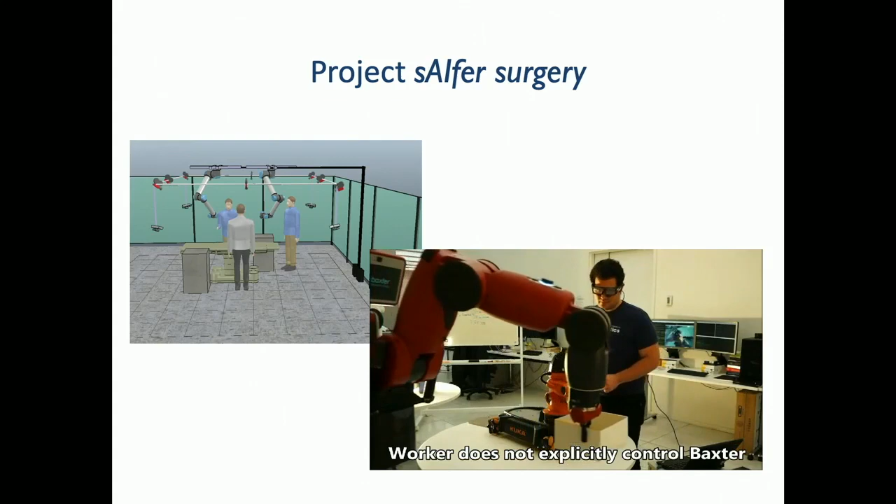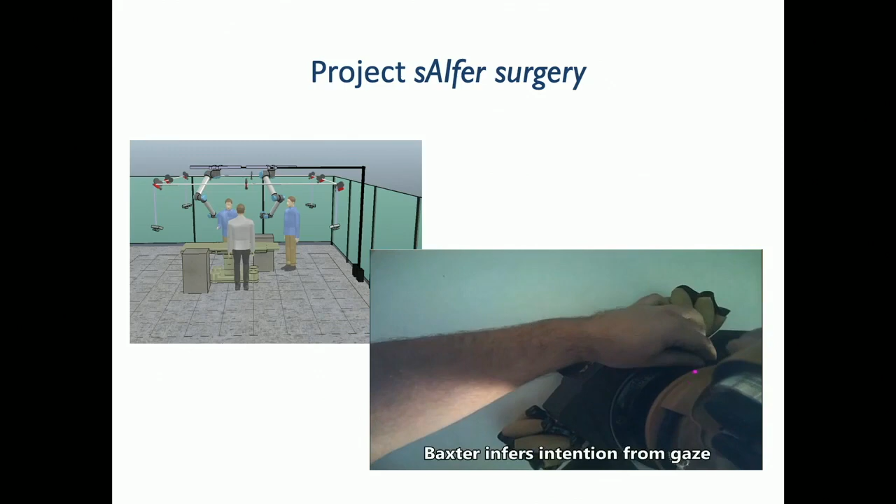This is not surgery, this is actually assembly in more of a manufacturing context. But this is in my lab, and that's my PhD student, Svetlin. What's going on here is that you have this Baxter robot trying to help Svetlin as he's assembling another robot. His sequence of movements is a plan. He goes through: pick up this part, put it on top of this, once I have it, get something else, assemble it, and so on.

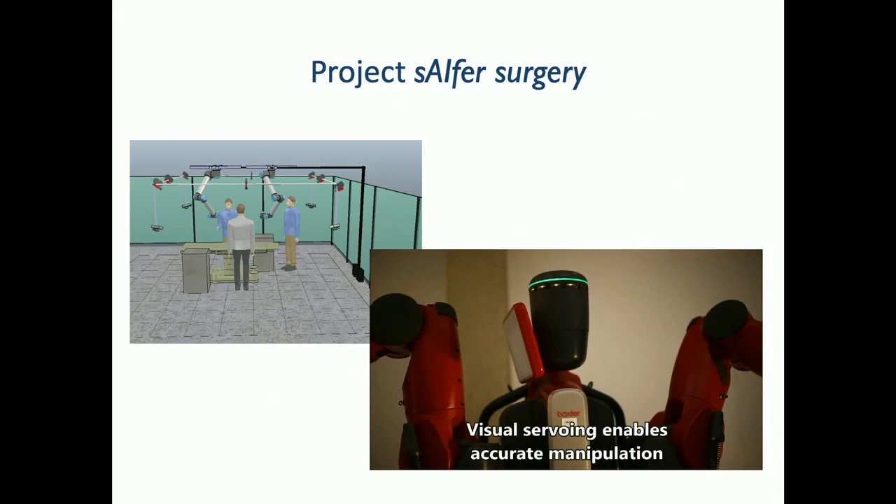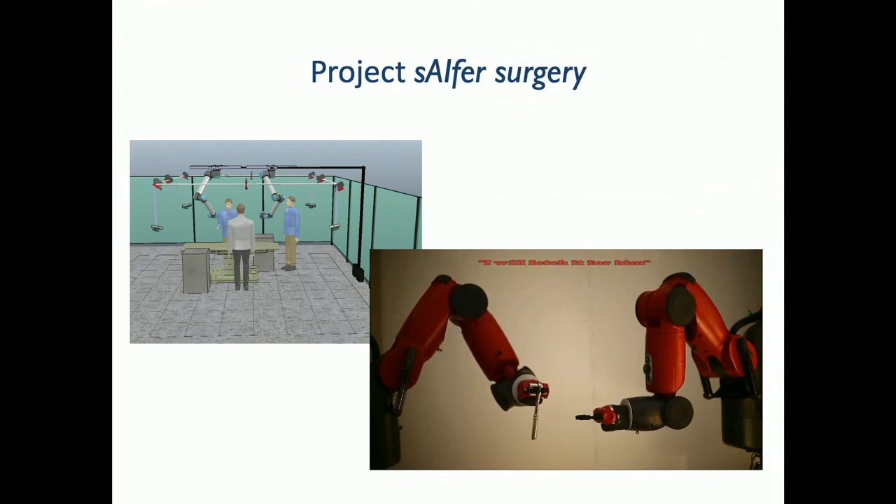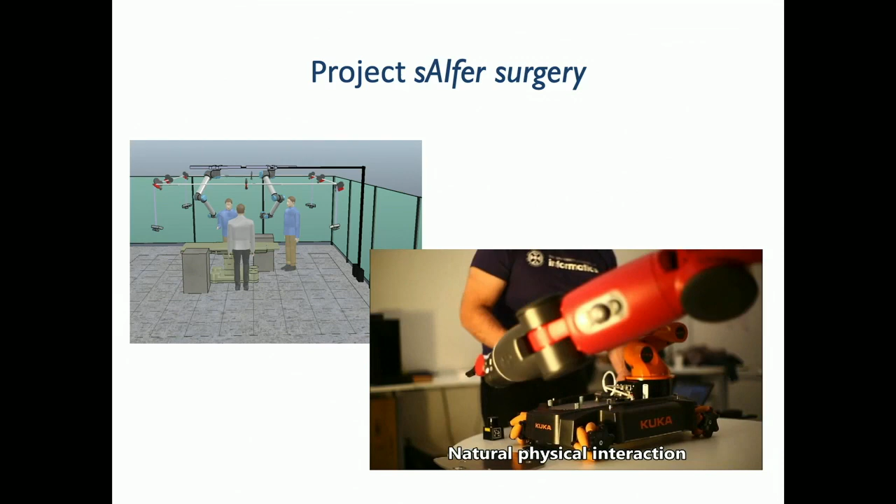So it's something you could specify at a high level, but there's a lot of low-level complexity to be dealt with. What the robot is doing is, from vision and eye tracking, estimating what his planned state is. And depending on what that current planned state is in the execution cycle, which has branches and so on, based on that estimation, it's taking what would be an appropriate action. This business of what is appropriate has been told to it ahead of time. That violet dot you see there is us fusing vision and eye tracking and putting it in 3D so we can visualize what's going on.

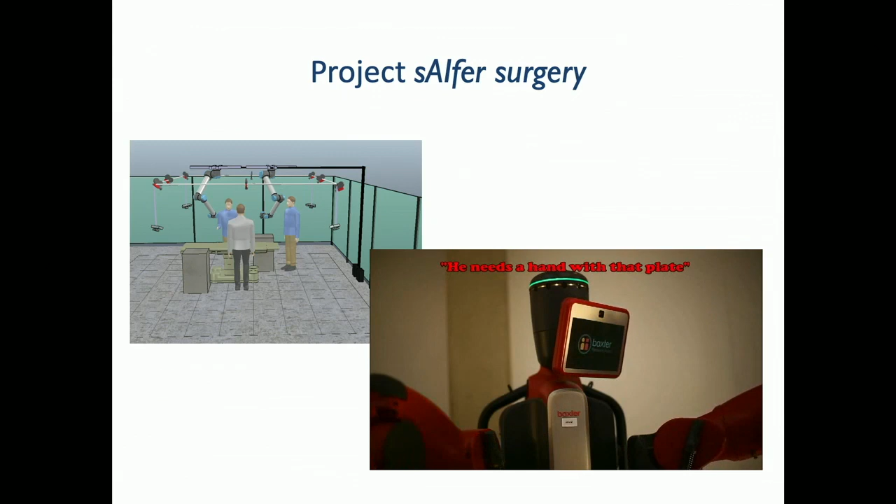So that's a kind of basic example. In my lab currently, we are setting up a more serious setup which would mimic an operating theater. We are trying to look at whether we can automate things that are done by a typical nurse and a junior surgeon, working our way up.

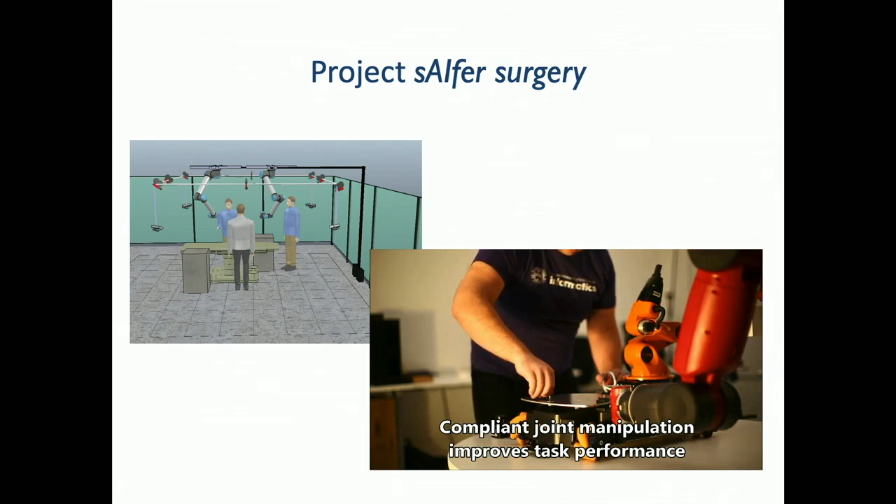The point of picking an example like this is to motivate questions, not just in terms of wouldn't it be nice if, but asking what would these people really want, and can we actually deliver that?

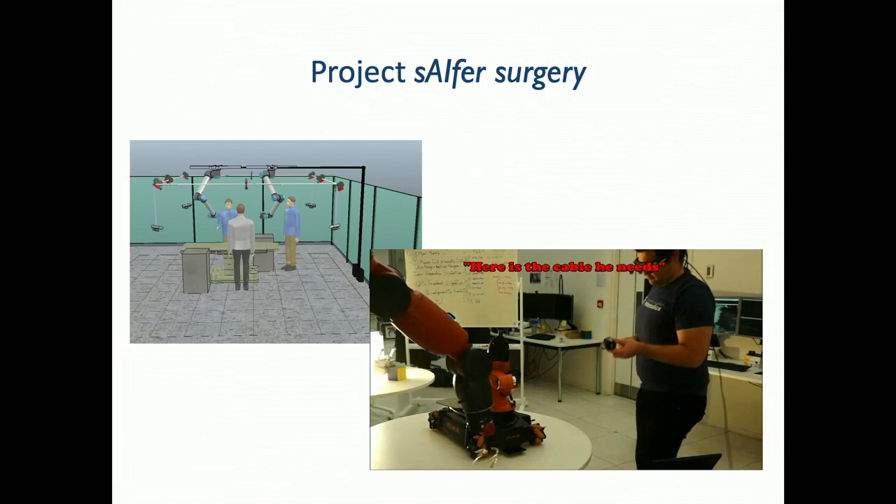Now, looking at it from another point of view of the actual tasks involved, there are grasping tasks, manipulation tasks, and so on. I think many of you are probably aware by now that there's a lot of excitement in the robotics community about the use of deep neural network methods.

So here are videos taken from various groups around the world doing really exciting things with robots. People are really able to do interesting things, particularly when it comes to specialized tasks like grasping arbitrary objects and figuring out what the physical properties of objects are, and so on and so forth.

In the kind of more extreme version of this, when you think about it, what people are excited by is the fact that there is the possibility of having a completely general purpose mechanism which doesn't need any domain-specific knowledge at all, and then it just continually improves. That's what one is trying to do with a typical kind of reinforcement learning setup.

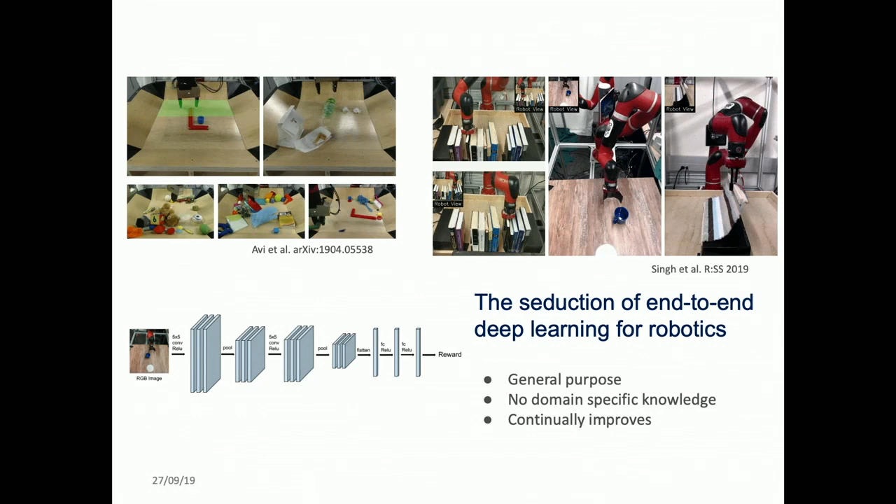But then if you look a little bit beyond the label, you find that actually it's not so straightforward. As somebody who runs a robot lab, here again this is back to my lab, this is one of my robots. This is a task we picked as what we would consider to be the most basic task that would interest a surgeon. It's only after we did this that we got meetings with the surgeon I work with.

So the task here is to scoop out a little slice of grapefruit. We took away the job of the second hand, so the grapefruit itself is pinned down to the board. But you still have to make some very careful judgments about how you want to move the knife and exactly what the force profile should be so that you can achieve this task. It's not as trivial as it looks.

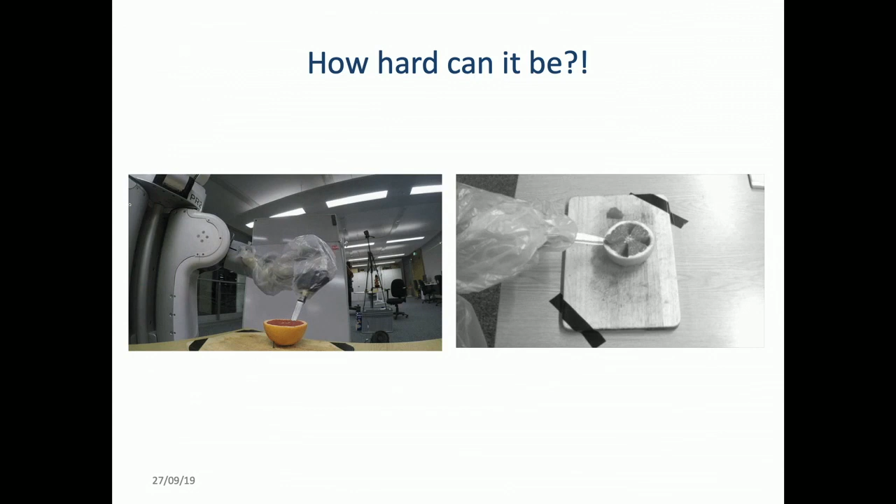So we do it effortlessly, but we only do it as adults. And it's actually, although it's just cutting fruit up, quite interesting because for the surgeons, they consider this to be kind of step zero of what is actually tumor removal. If you flip the hard with the soft, this is how a tumor looks in your brain. And so when I look at a problem like this, there are three things that you should note.

The first issue is that the modalities needed to complete this task are quite diverse. In fact, except for the very first point at which you insert the knife, vision is largely useless in the sense that once the knife goes in, you don't know exactly what's going on underneath. So a lot of it is in the haptic channels. But for the haptic channel, you don't have an exact model because it's just a fruit. You don't know what the internal irregularities are, and you're trying to somehow find what that space is.

We don't have that much data in a domain like this because we have to find the fruits, we have to find the demonstrator, we have to find everything. So we're not talking about billions of examples here, we're talking hundreds of examples. And that's pretty typical of most domains we work in. So we have to think very carefully about how we want to set up our models, how we want to adapt our methods, what we want to pre-train, what we want to borrow, which means we can't just go in naively with the use of the methods. We have to think a little bit about our methods.

Now, in the robotics community, once you lay out all of these problems, the approach that quite a few of us pursue actively is called learning from demonstration. In the same way that supervised learning and certain forms of unsupervised learning are the dominant ways of describing a vision problem, in robotics, probably one of the most exciting approaches for robot learning is to say that it's realistic for us to ask a human expert to give us examples of how a task is performed. In that case, it's realistic for us to say, here are a collection of fruits, please cut them up for me. And we can get a normal person to do that much. Then, having done that, what we want to do is pick up everything about what the task was, what variables were important, what specification describes this task, and how you want to actually perform that. So that's what we want to pick up from all of this.

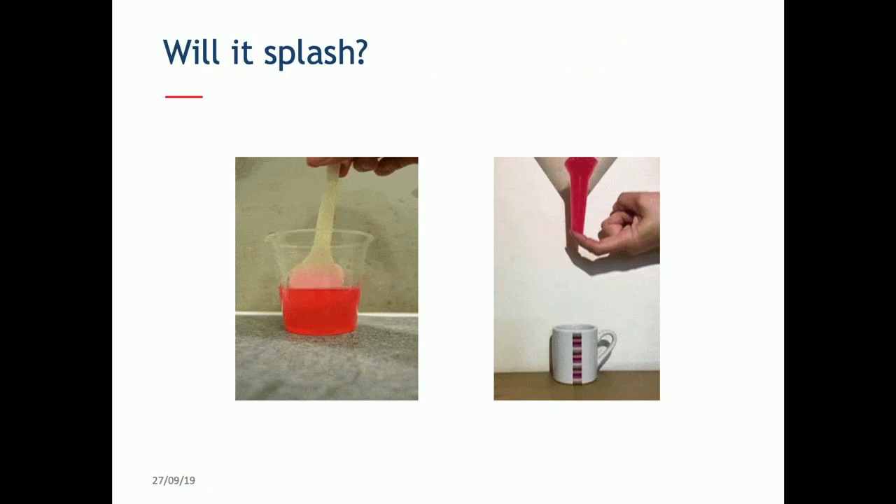In your head, you have some kind of reasoning that says, well, it depends on what the viscosity is. And so what you might do, especially if you're allowed to think about it a little bit, is either simulate or perform some kind of an experiment like this that says, the last time I played with this liquid, if it was thick and sticky, then most likely it won't splash. If it was loose and free to flow, then it would splash. And so this is what happens. Because such a thick liquid doesn't splash, it actually cleanly stays inside. This is the kind of reasoning you have to do if you want to do planning for the things I'm talking about.

So how does this reasoning actually happen? So the claim here is actually that you have to have some models. At the very least, you have to have some level of intuition and common sense models. This is a claim that has been advanced very effectively by groups such as Josh Tenenbaum's at MIT. In fact, those examples are inspired by things I've seen him say. And I'm not really going into exactly what is inside the brain of the human.

I'm more asking what would be effective ways for engineers to acknowledge this and somehow do things. So in this particular experiment, what we did was to say, okay, so we're going to build up some kinds of models. So in our case, the model was in the form of a simulator, and the simulator had certain parameters about this task that had been given, such as the shape of the object, descriptions of the fluid. And then what we wanted to do was to calibrate that simulator to reality, and then having calibrated that, use that in a planning process.

Okay? Because this is not the core focus of my talk, I won't take you to the details of this method. I just want to give you a glimpse for what I want to capture in a model. So the first thing you notice is that when you're thinking about what the simulator should encompass and what you want to represent about it, you realize that the properties you want to get right depend on what the task is. If you want to worry about whether it's going to splash or not, it depends a lot on viscosity. If you wanted to represent something about its visual appearance, maybe it depends on something completely different, like surface tension.

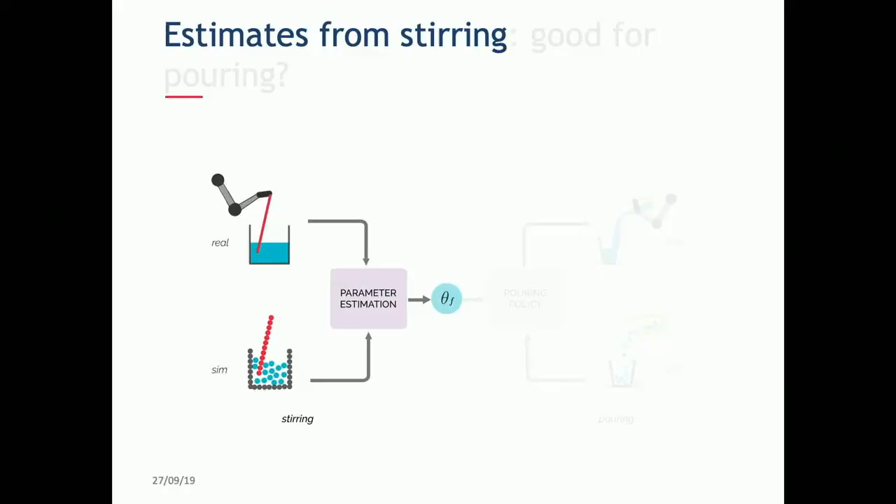So for instance, the way in which we actually did this is that we took actual data from how people were stirring liquids. We looked at the realized behavior in a number of different simulators, and then we perform a Bayesian optimization loop to figure out what the best parameters are. There's one example of how you might reason about a model. And then that allows us to optimize pouring policies. Good question. Yeah. That theta f now limits the kind of transfer that you can also do. Absolutely. Yeah.

And so this is exactly the point, is that just like historically in engineering, you would have had 10 years of debate about what are good parameters. I think that the point I'm saying is there's no getting away from some of that thinking. You have to do that thinking. The question is, can you find theta f's that are coarse enough that you say just enough of what you want to say and then let the model do the rest of it? So it's in that balance.

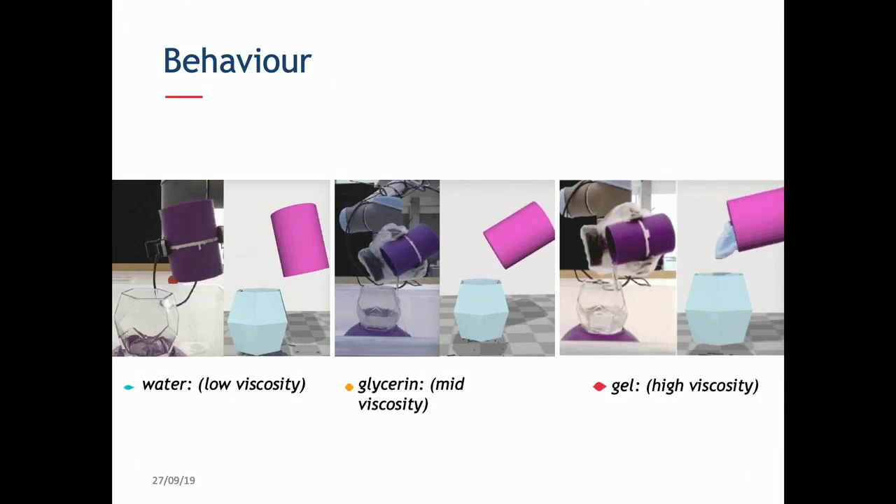So here what we are showing, and the left side of each of these is something in our lab, is the robot having figured out these kinds of properties, how it figures out how to pour in the most effective way with the least amount of splashing, with this being its internal representation. Right? So that's what, yeah, go on. Give a bit more details about that internal simulator. Like, I'm trying to get a sense for what was the parameter space, how was that simulator?

So it really is just an NVIDIA Flex simulator with a kind of particle-based approximation to the fluid, and in that interface we are given high-level parameters that correspond to all the fluid dynamics parameters. So viscosity is an example, and so what we were really playing with there was viscosity. So how high dimensional was that Bayesian optimization landscape? It wasn't very, because we were only searching over that low dimensional space of parameters.

It could get high dimensional if you want to explore with a lot. And actually, when I get to my main result, which is what I'm talking about next, I'll tell you a little bit about this dimensionality question.

So that whole preamble was to give you a flavor for, kind of shake you up a little bit and say, think about models in this way, right? So models are not just things that are hyperparameters in a network, but there actually is more to it from the physical point of view.

Now I want to take you a little bit more into kind of robotics specific things. So in the robotics community, we've been talking about these kinds of representational issues for a very, very long time. So in fact, my PhD thesis work was on learning to walk, before we had things like Atlas. And so it was still a worthy question for a single solitary PhD person to ask.

And so you can think about a large task compositionally in terms of a smaller set of this, where the representational question, the equivalent of picking the theta f, becomes what funnel, what shape, what switching logic, and so on and so forth. This constrains you, but it constrains you in just about the same way as picking a basis function in function approximation, in that, yes, you're making a choice, but then the choice allows you to do quite a bit, right?

And so what we are trying to ask is, to the extent that people have handcrafted controllers, and in fact, today, if you look at Atlas doing its backflip, it still is doing that. It's the same first author in the same company. And so when you have these kinds of representations that are working well for people, can we somehow use that inside a learning model, and would that give us any real leverage, right?

And so we are interested in having flexibility in the sense of being able to answer questions like this, which I would claim would be hard for us to answer unless we had some kind of structure. So in this case, the task for the robot is to kind of go from one object to the next in a sequence, and if it hits a certain kind of object, it should flip around. So it goes A, B, C, D, E, and if it hits E, it should go back around, and then it just does this in an infinite loop. It's a kind of trivial program you could write, okay?

And if I wanted to ask a question like, what would happen if I moved my objects around? What would happen if I insert a new object? What would happen if I wanted to ask, will this ever terminate? Things that a regular engineer would just ask naturally, right? There's simply no way to answer such questions if you leave everything implicit. So you have to somehow elicit the structure so that you can reason about it a little bit.

And what we are arguing is that if you're sensible about your choice of controller structure, there are ways of marrying this. So with respect to that particular inspection task that we kind of cooked up, it's a tabletop inspection task with a collection of objects. What we want to see is, is it possible for us to go from a human demonstrating this task, not actually telling us what the task is, just demonstrating it, and is it possible for us to do system identification of this full structure, including the low-level controller and the high-level switching logic?

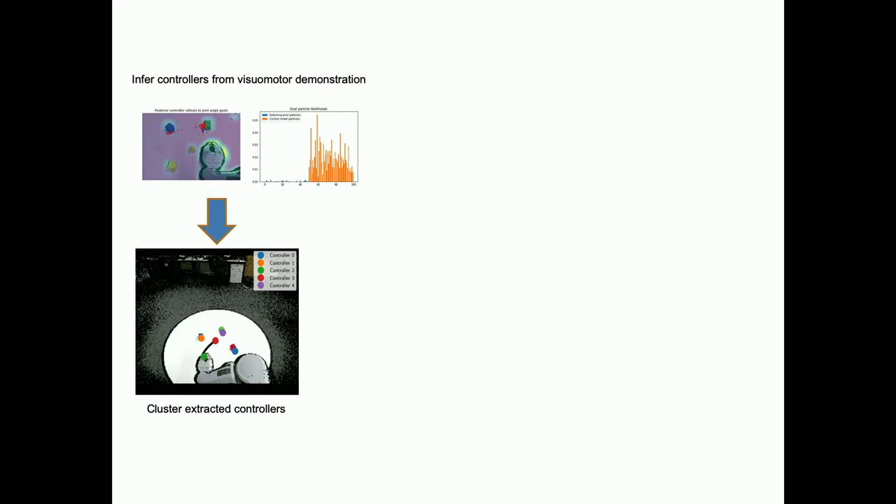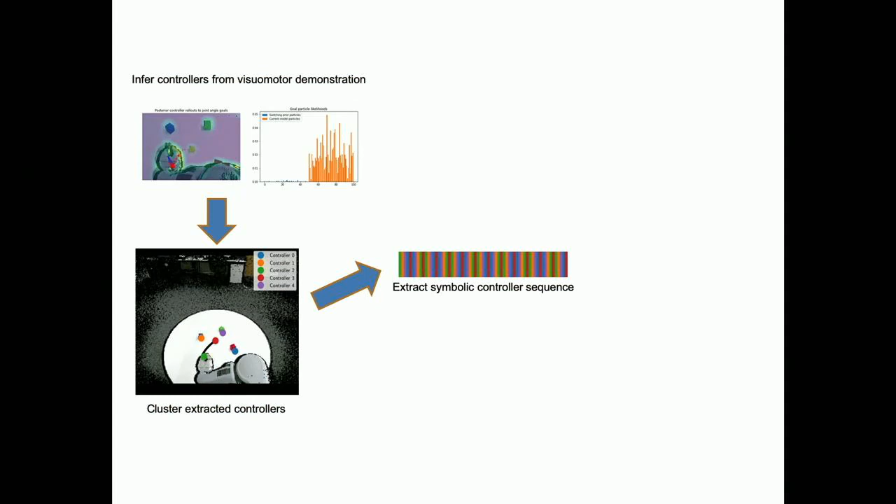So from clustering those things, I get that in the underlying world there are that many objects, and those objects are located here, which I picked up from that input, which I can reason about symbolically by saying now there's only 5 objects in the world. So I'm looking at the sequence in which you visited those objects, which can be interpreted using your favorite string parsing or grammar learning approach to say that's what the underlying task was.

So we've gone from essentially just a video input of the person demonstrating to a description that says your task is to execute this sequence, where each step refers to one of those controllers from my previous slide—each one is a reach. The one bit I should mention is that the original controllers learned in terms of joint angles. So we train one more network that grounds those joint angles into world coordinates, so that this program you've learned can actually be generalized to different orientations of objects.

So here's a learning loop in which we've put in structure, specifically that this way of thinking in terms of sequencing of funnels is a useful description of control tasks. But we've been able to be fairly general in all other ways, so that we can actually learn a switching control strategy from demonstration.

Before this, in the previous slide—yeah. Did you run into credit assignment kind of issues, as in if I'm learning this model that's first trying to just predict, based on the visual scene, what's the action being taken—is the model bogus, or is it the case that I've learned good models and I can trust its predictions, and the fact that it's getting confused and predicting two different things gives me an indication that I should be switching?

And what we want to do is to take the controller parameterization that is loved by control theorists, and 95% of the world's controllers look exactly like this. Except what we've done is to take this structure, put it into here, and then find a way in which we can just learn the bits that we want inside this architecture using the network.

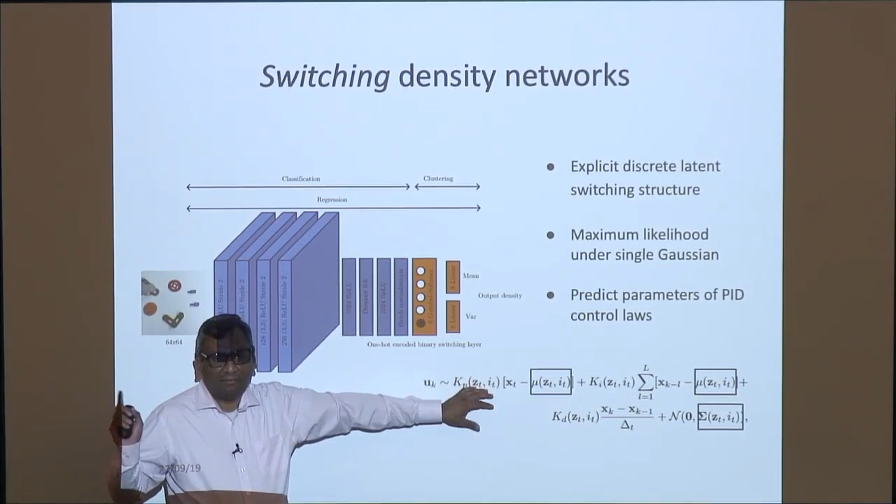When I say take this structure, what I'm saying is that this is a high-level description of the task. You still have to do it from pixels, which is what we are doing. So we're still doing all of this to go from pixels. But then we're saying that the control bit, the bit that really matters for describing the task at that level, is not that complicated. And so you can kind of encode this in the network.

So this is all learning from the data. We're going from data which doesn't tell you what that structure is to a model that tells us that this is the structure. And we've applied this to a few other kinds of problems.

So here's another problem that is very well liked by control theory people and reinforcement learning people, which is to swing up and balance a pendulum. The interesting thing about this problem is that if you were first taught as a control theorist, as I was, then you will realize that this is elegantly simple and beautiful, which is that there's only really three things that happen here, and those three things can be described in terms of linear functions. And if you do it like that, every controller you learn will always look like that.

And it turns out that those three things are discovered by our switching network. It discovers that there's a swing up phase, there's a balance phase, and so on. And likewise, we did another task which had to do with switching phase when you open a box, and then it learns that you first have to reach and then you have to do something else.

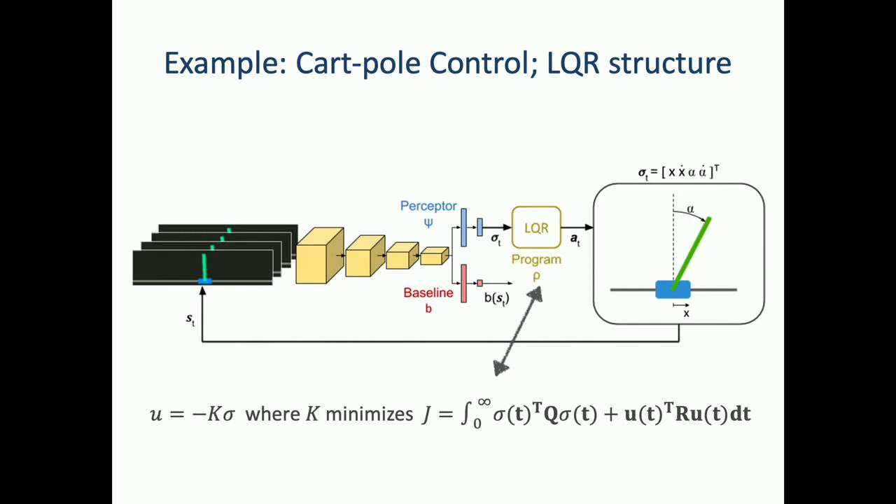Quick question: what is it about REINFORCE that allows you to do this? It's just the most general form. It's not the most sophisticated one—you can have much more sophisticated gradient estimators with stochastic mini-batches and so on.

Can you extend it to any other policy gradient methods? In principle, we could have done it with any other. In fact, if we did it again, we might try it with a more sophisticated version. But the bit about what we are saying is more in the fact that you can factorize the policy like that.

So here are some examples of what we've managed to do with that. Here's the pendulum swing up task. The task is defined in terms of going from pixel description, so we don't have a state space description, we're just giving you the images. But what we are saying is we know that this is the way to stabilize the pendulum. We don't know what the pixels map to exactly, but we know that's how you do it. In many domains, this is how it works. So specialists can tell you what the general structure must be. What they get wrong is the embedding.

So what our procedure allows us to do then is to train in the loop. And when we train in the loop, we actually get improvements in terms of the convergence rate. If we did it without all of this structure, it takes much longer to reach the same level of performance than if you did have this kind of structure.

What's going on in all of this is that we are really regularizing the latent space that's being learned. So when I'm just giving you the pixels, somewhere you have to discover the fact that there is a joint angle, a state, and so on and so forth. That's being picked up in this process. But by telling you that it must fit this program, and the program must be useful in the task, I've actually regularized the problem quite a bit, and I'm forcing you to pick that up, because any other variable you picked up from the pendulum, like reflectiveness, would be useless when put into an LQR controller. So I'm forcing you, by the task, to do something like that.

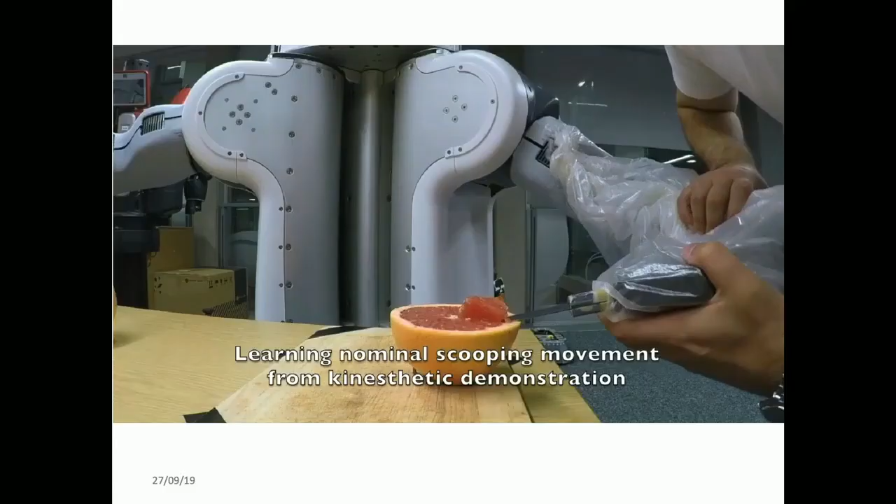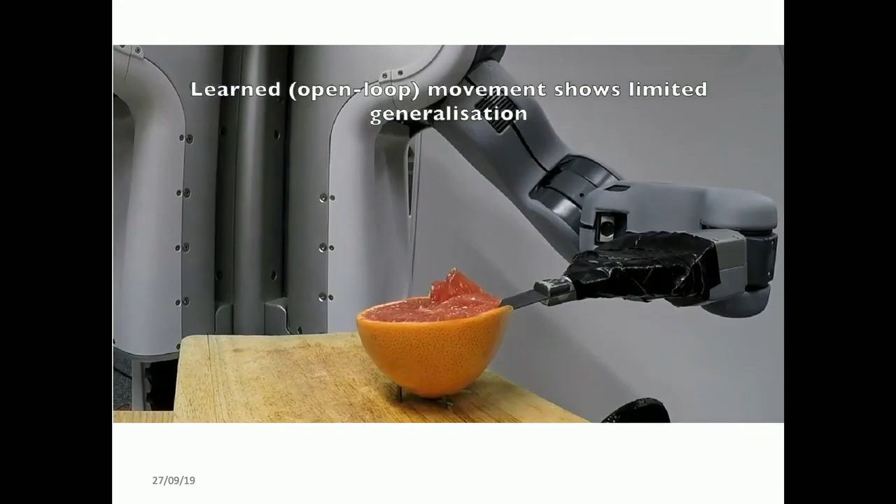So I wanted to end by showing you an example of some current work we are trying to do. In this video, you see that fruit cutting task again, and this is what the person is showing the robot. If you just naively copy what the person has shown the robot, you find that it actually does pretty badly — which is good for a machine learning person, because it says there is some need for learning here. So these are kind of just naive open loop learning. If you just said, 'okay, I'm going to learn how to do this,' then you find that it's actually pretty hard.

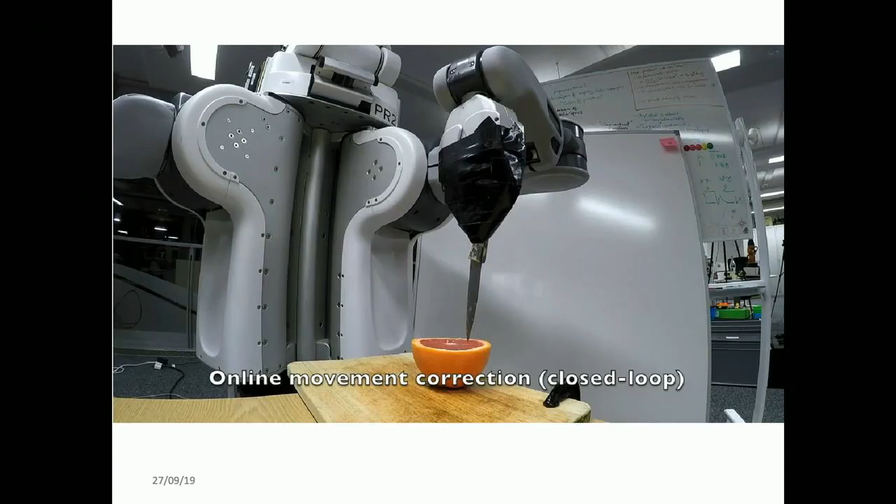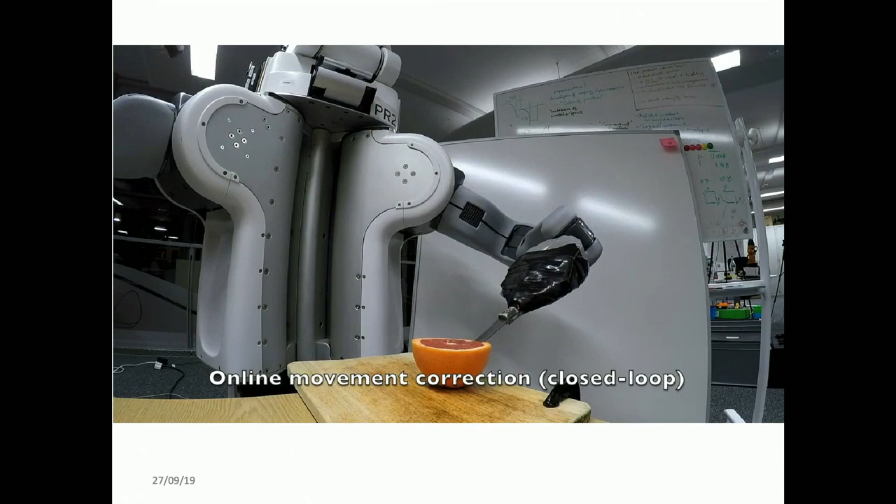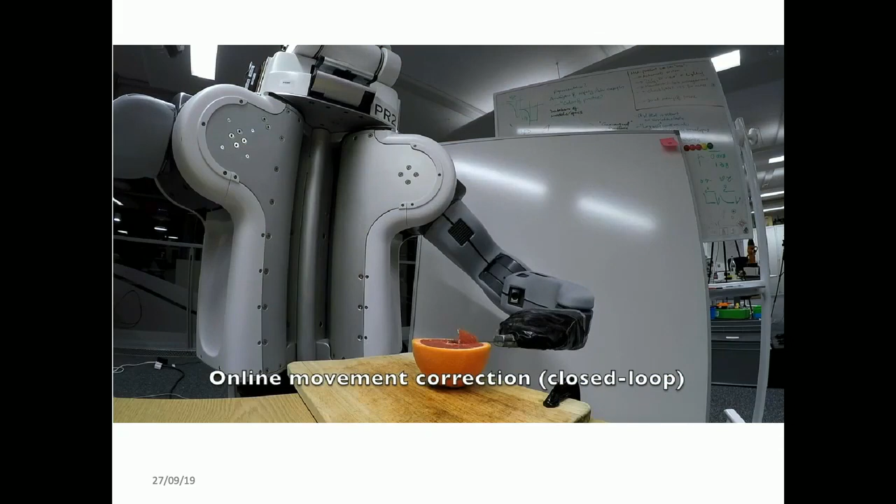So the way we solve this problem is quite interesting from a cognitive perspective. Because we have no other perception of where the fruit is and where the peel is, the way we solve the problem is that the cost function the robot has is to classify whether the trajectory is going to get stuck in the peel. And that classifier, by the time it gets good at predicting whether it's going to get stuck in the peel and get a bad reward, will end up implicitly giving you the shape of the peel. So if you give that as the parameterization for the robot, it figures out pretty well how to exactly scoop only that bit, and it figures out all the other stuff about how to control the forces and so on.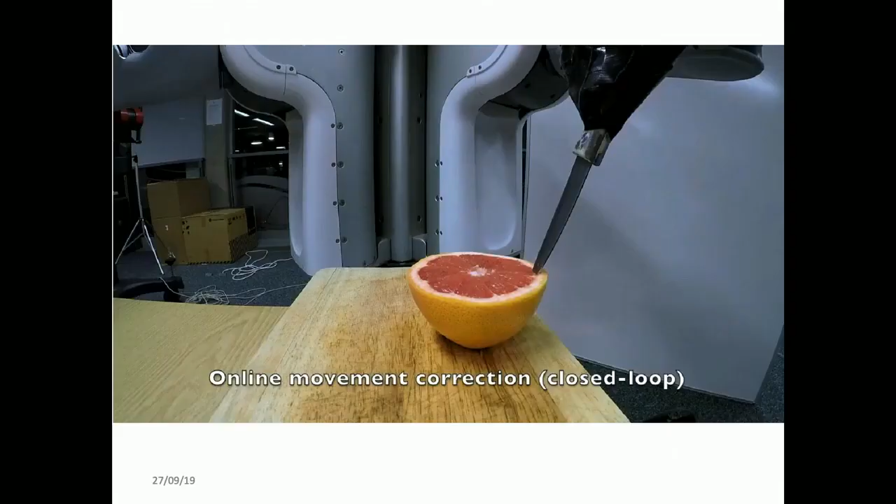So this is a typical task that we are going after. It's fairly challenging from a robotics point of view because the object is quite high dimensional. The underlying physics are quite interesting, in that it's not immediately obvious what to parameterize and what not to parameterize. So we're playing with all aspects of what simulator to use, what descriptions to use, and so forth — but also what specifications to use.

So as I said, we are only playing around with fruits because we haven't gotten around to phantoms of brains, which is what we really want to do. Our end goal with this project is to work with actual surgeons who are doing tumor removal, and to do exactly this process. The objective function there is to try to take only the tumor and not the rest of the healthy tissue, which if it's in your brain, even one millimeter matters. And safety specifications are important — don't go near a certain kind of artery is literally a life and death matter. So one day when we reach something like that, which might be ten years away, all of these problems are going to play a role. We are taking baby steps towards that, trying to see how we can line up all of our robotics technology towards it.

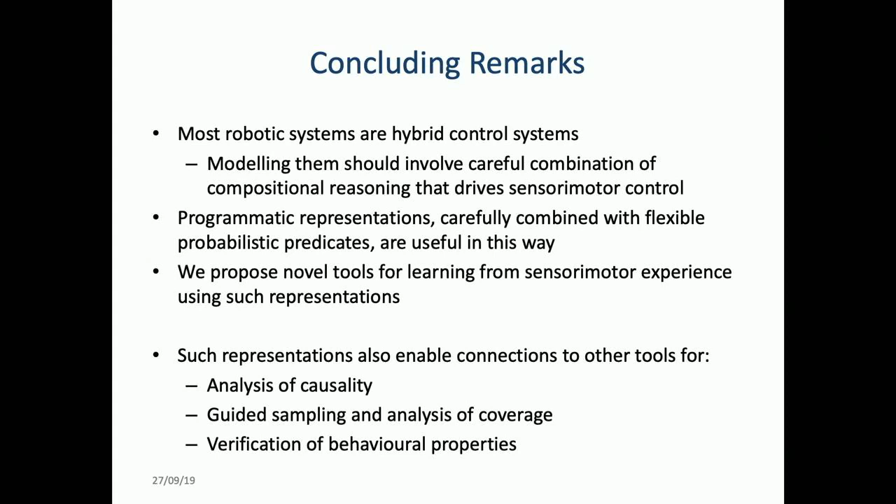So I wanted to end with a few concluding remarks, which is that having worked in this area for quite a while and having looked at lots of different problems ranging from locomotion to today manipulation, we believe that representations like hybrid control systems are fairly powerful with respect to describing what you want in the task. So the hybrid control representation is a marrying together of low-level controllers with higher-level switching or programmatic structure. Right? And so if you look at it, then all the results I've presented to you in one way or the other kind of marry these things together in different ways.

And so what we're looking at is ways in which we can define models that can do a good combination of these, and then asking the question, what are judicious choices around them? The reason we want models like this is because we want to do a number of other things that from the application domain point of view are absolutely essential. You want to be able to reason about causality. You want to be able to do coverage-based verification. You want to be able to ask about long-term behavioral properties such as, will this controller do this, or how often will it do this? Right? So there's no way you're going to deploy serious applications without answering these questions.

Having representations like this allows you to answer such questions. And so what we are trying to do is to come up with tools that get us there while still doing everything else that we love about data-driven ways of thinking about model learning.